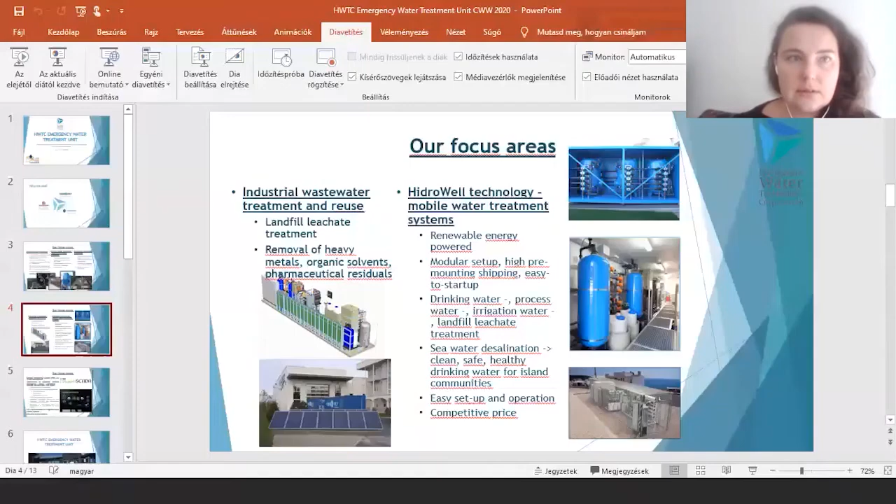Can you see it now? Yeah, it is perfect now. Thanks a lot. Okay. I'm sorry. Sorry. Okay. So I went through the three members, and I'm basically at the very first slide, so you didn't miss anything.

So I was just talking about the importance of the membrane technologies in drinking water treatment. All these membranes have become incredibly sophisticated. We're talking about microfiltration or ultrafiltration, but also nanofiltration, or where are we going to get next? And this is so interesting about innovation. It does take place in the smallest areas of every industry, and this is what is probably going to make us go forward with more and more efficient and effective solutions for the water treatment industry.

Of course, something that you're probably all incredibly familiar with is reverse osmosis. It has been a revolution, and also electrodialysis, which really allows us to gain a water that is highly pure. Now, we talked about drinking water, but we also focus on process water treatment or high purity water. This is incredibly important for different industries, as you might be familiar with, for the electronics industry or pharmaceuticals, but also I have a background in the nuclear industry or in power plants.

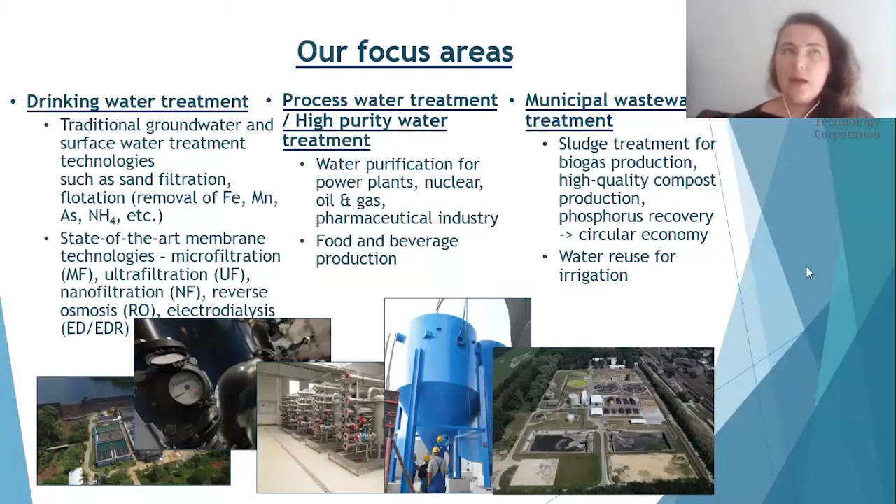Also, on the other side of human consumption, we come to municipal wastewater treatment. We are dealing with sludge treatment for biogas production, high quality compost production, where you recover phosphorus. And we like to think about this as actually giving our share to the circular economy.

How important is it to talk about water reuse today? We are definitely striving to end up with as little wastewater in our water treatment processes as possible. And we know that humanity today is just producing more and more wastewater, but this wastewater is higher and higher in toxicity. So we are definitely focusing on this area as well.

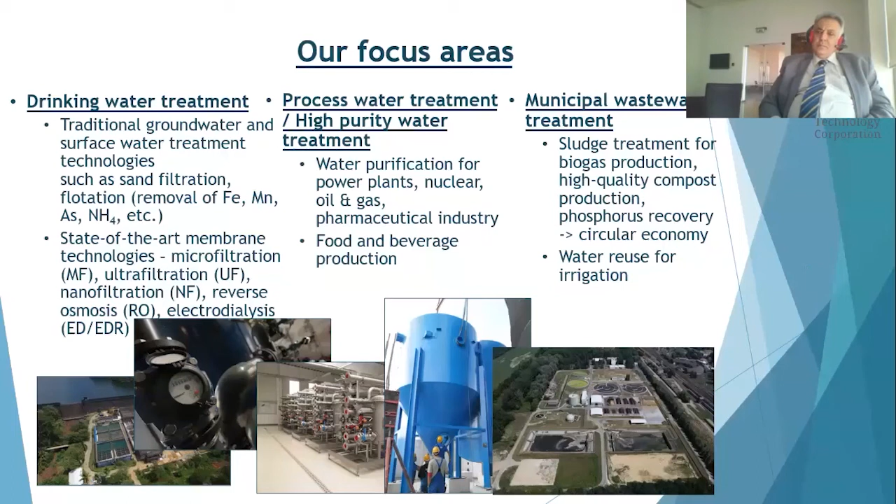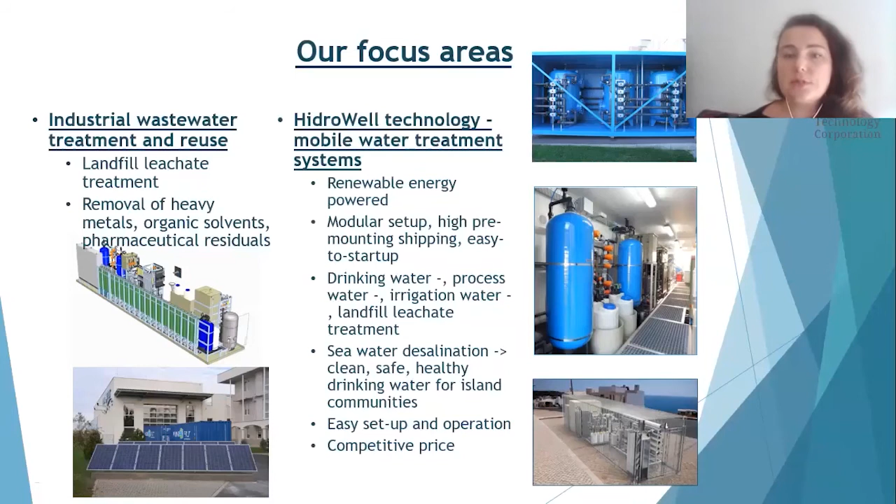Now, if you bear with me, I just have two more areas that I would like to talk about. We've talked about technological use of water, but now we have to talk about the wastewater. What goes in must come out. When we think about the wastewater that is produced by the various industries, we have to think about the fact that many times this water goes into the soil. It can contaminate rivers, or it can just poison the environment. So we do have to deal with leachate treatment, but also removing heavy metals, organic solvents that can come from the dye industry, pharmaceutical residuals. This is highly toxic for the environment.

And finally, before I go in to talk about the units and the solutions that we have for emergency situations, I'm just going to talk about our HidroWell technology very briefly, which is a technology we are very proud of, and it consists of the different water treatment units in a mobile container format. This is such a big advancement for us, because imagine a 20 or 40 foot container that is highly mobile.

We just put it together. We prepare everything based on our partners' or clients' requirements. We put it together in our warehouses in Hungary, and they are ready to ship. They are very modular. They can be personalized. And they are very easy to start up. We can use it in different applications in different areas to produce drinking water, process water, but also for irrigation. And as I was talking about, industrial wastewater, landfill leachate.

Now, another important area of application would be seawater desalination. And we have been using this solution for a lot of the coastal communities, for example, along the Mediterranean.

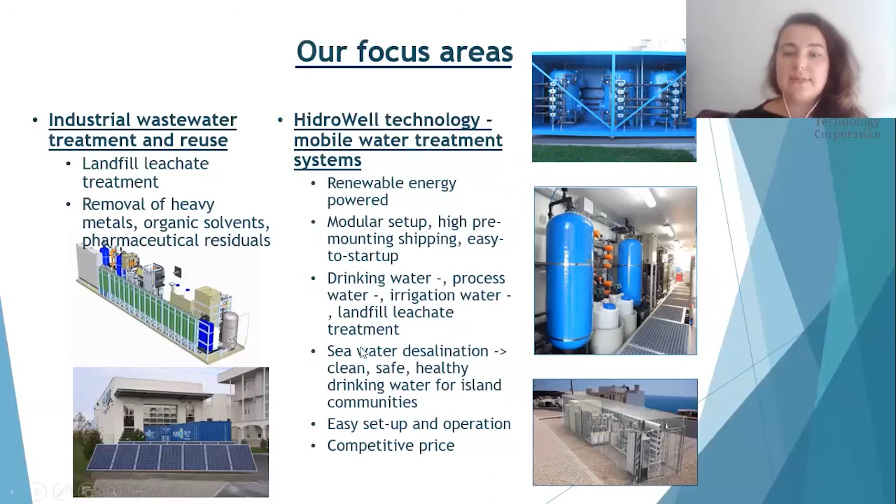As I mentioned, apart from a competitive price, because this is a compact solution, it's incredibly easy to set up. Of course, we guide the setup and also the commissioning. And for the operation, for further use, we provide training for operators, and it's extremely easy to use. It can also be connected to the grid in terms of power, but it can also use renewable energy from solar panels, for example.

And just to mention what our partners at ControlSoft are helping us with, if you take a look at this little picture of the grid of how this server would work, if you are familiar with a typical SCADA system, which basically uses artificial intelligence-based algorithms to analyze the data and plan a reaction to it. This makes monitoring and operating these systems incredibly easy and transparent.

Now, if you look at the left side of the SCADA server, we see that there's an intranet, which means that once we install a unit, the client or our partners can use this information through an intranet and just operate the units from their side. However, if that's not possible, or if they require help with that, with access to internet, even HWTC or the HidroWell team can assist through the internet connection from a remote location.

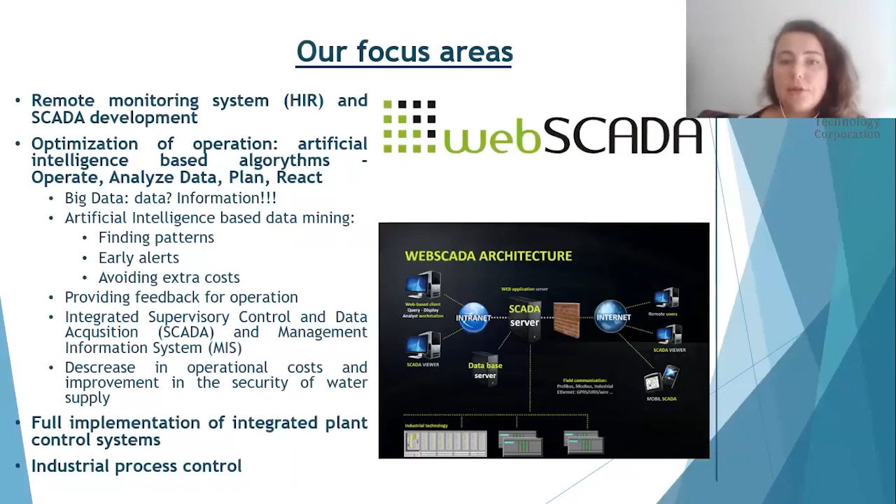our emergency solution. These can be shipped out to remote areas or areas that are very often affected by natural catastrophes, coastal communities, even, for example, military bases where we know that those are regions of higher risk, and we might need an emergency water treatment unit.

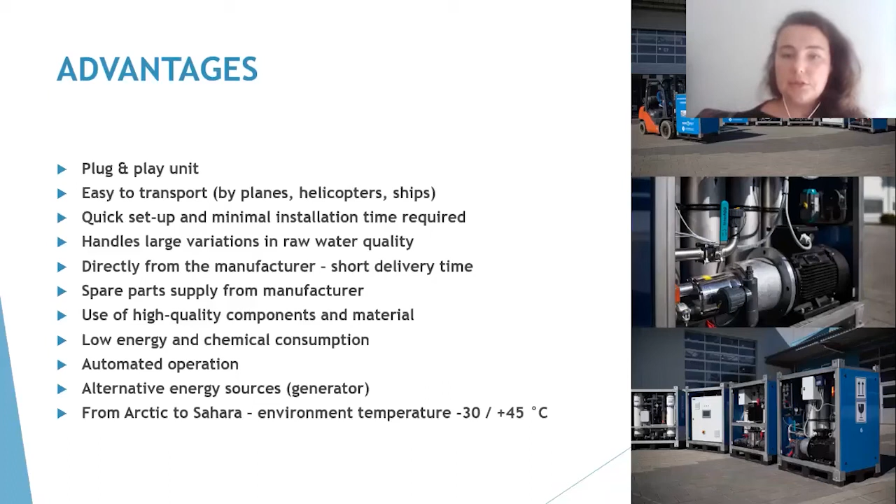And it's very fitting that we are at Cairo Water Week, because I wanted to mention how these units are actually able to bear temperatures ranging from -30 to +45 degrees Celsius. Now, only a few technical figures, however, I'm not going to go into that very deeply, but the dimension of the containers, you have seen how small and compact they are. And we are talking about 9 units.

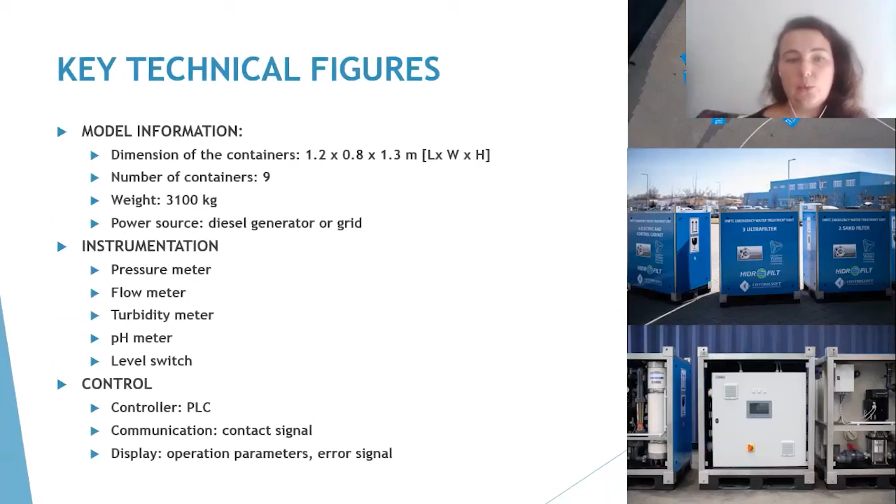The capacity, this is also very important. If we talk about surface water, may it be river or lake water, it can handle up to 6 cubic meters per hour. If we take into consideration brackish water, the capacity is slightly lower, 4.5. And if we talk about seawater, then 2.5 cubic meters can be treated per hour.

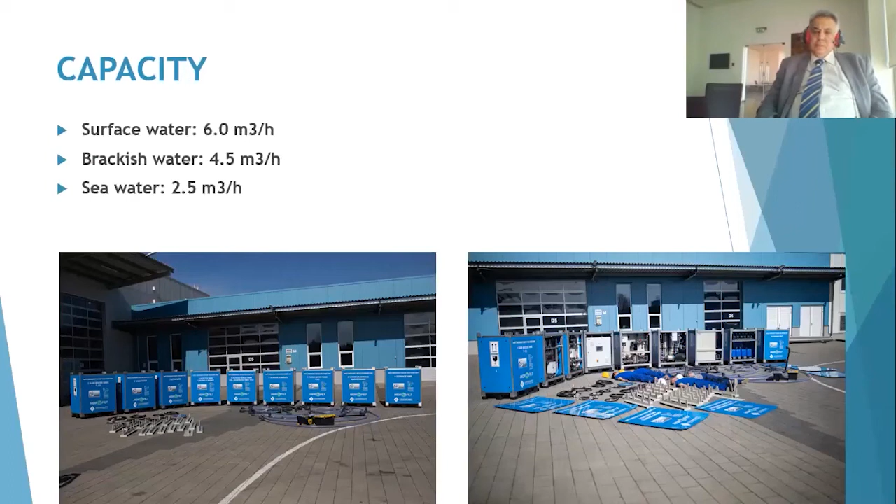Now, the treatment process, just in case there are some attendees who are not extremely familiar with this kind of process, let me just walk you through it. We pre-treat raw water through pre-sterilization. We add chlorine to the water in order to halt the microbiological activity. Basically, microbiology is not desired to go into our units. It's not desired to go into the instrumentation. It can harm it, which means that the longevity is compromised.

Once the chlorination is done, we are going to a first step of pre-filtration through sand filtration or multimedia filters. This is going to retain all the bigger floating particles in the water. It's going to give us a fairly clean raw water, but then we're coming in with a second pre-filtration, which is ultrafiltration, and this is usually done by a membrane technology. This is going to retain all the microparticles in the water,

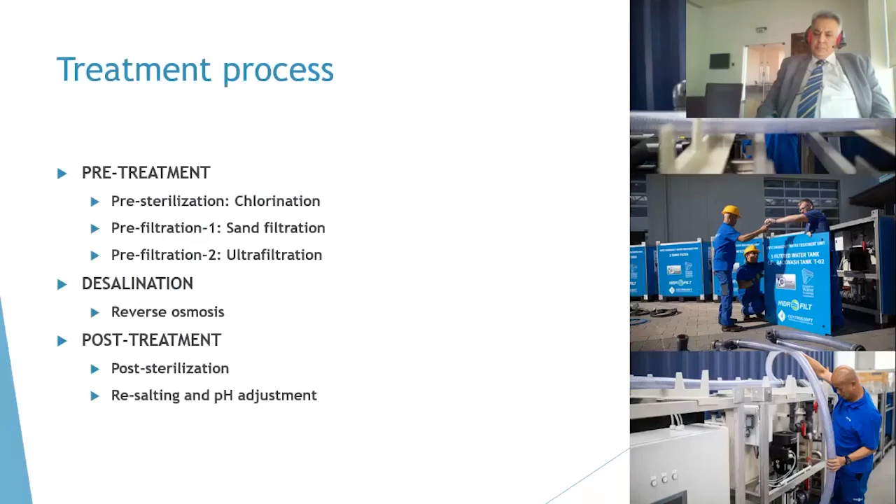Now, just to finish up, I already mentioned that we offer training as well as after-sales service, but let me just highlight again that the 1 week intensive theoretical and practical training for the operators operating these units is ensured by us. And we will also be there during commissioning, which means that first-time installation and commissioning will be done under our supervision and with our assistance. And finally, we are going to support the operators as much as we can from a remote location.

Just for those of you who might be interested in learning a bit more about this solution, we do have a very good reference that was commissioned by the National Disaster Risk Reduction and Management Council in the Philippines. This is a unit structure that has been implemented in a military base. And if anybody is interested in this, I'm not going to take up more time, I can, of course, give further information through email.

So this would be my presentation. I really hope there has been a good insight into what we are doing.